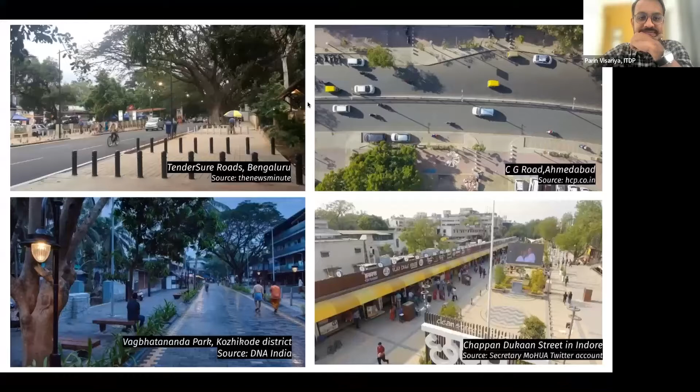Thank you, Angi. So what you see on the screen are some pictures of street design that have been implemented, and these are nothing but street designs from our own cities in India. The very first picture you see is from Bangalore, and many of you in the recent offline workshop also got a chance to experience these streets.

We have a commercial street in Ahmedabad, CG Road, which has seen a process of redesign not once but twice. We have a street from Kozhikode, and we have a pedestrian street right in the heart of the city in Indore called Chappan Dukaan. All these streets today have become benchmark streets.

And these are just a handful of streets that I'm showing you all. I'm sure our cities have done many such great examples, from Pune to Pimpri Chinchwad to Delhi to Chennai to Amritsar. So there's a lot of streets that our cities have designed that are at a benchmark level, created with good quality, good design.

And today these streets have not only improved the movement of people who walk and people who cycle, but at the same time have also improved the movement of traffic. So it's creating less congestion, less chaos, and giving a new image to our Indian streets, where we always felt that our streets are chaotic.

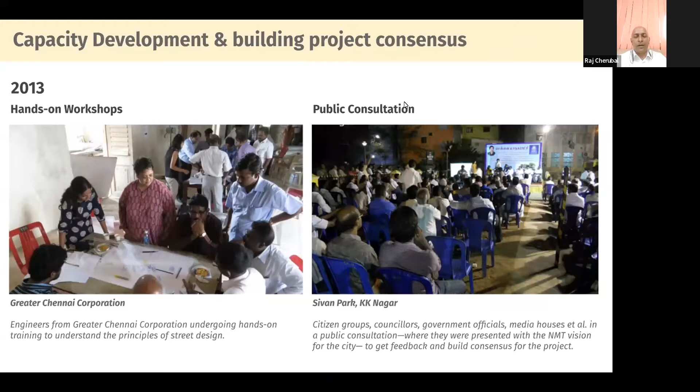The process started long ago, where the idea of having a street for people itself was like an alien idea. Why would you want to do that when you have so many cars on the road? So it took an amazing amount of persuasion from all kinds of different people, including ITDP and various other NGOs, a lot of parallel activities. Luckily we had a lot of sympathetic officials, and even when they got transferred, wherever they went, they ended up helping us.

I don't know about Paris and London, probably they do have capacity, but even there I suspect they get good consultants. We need space for people inside the city government who understand this subject, no question about it. They also should have some linkage with organizations like ITDP, etc., who can bring global experience. That's also very important. But the problems of the street are so complicated that no engineer or architect in the corporation can handle a city of 1 million, 10 million, and so on.

So, for example, just look at this street. The argument was, why would you want to widen the pavement when there's so much trouble? Is this a residential area, is it a commercial area? Whether it's commercial or residential itself is a big argument, and so on. So it takes a good consultant who understands all these different aspects to figure out how you park a car, parallel or perpendicular, who do you listen to, the shops or the walking people, what about the street hawker?

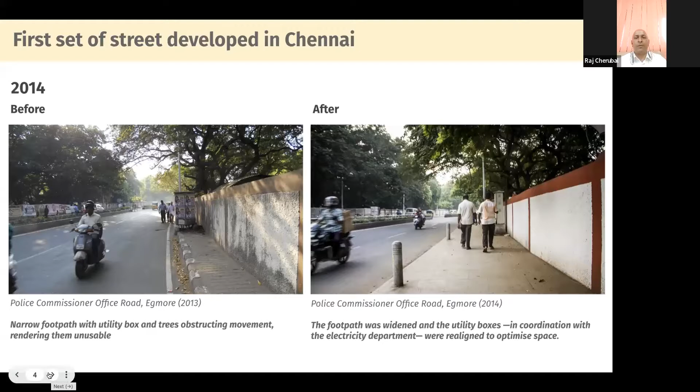But what people don't realize is the moment you build a footpath, people start walking on it, and people actually stop taking autos and cars. They start walking long distances just because there's a footpath. So you can flip through it, we can go through it.

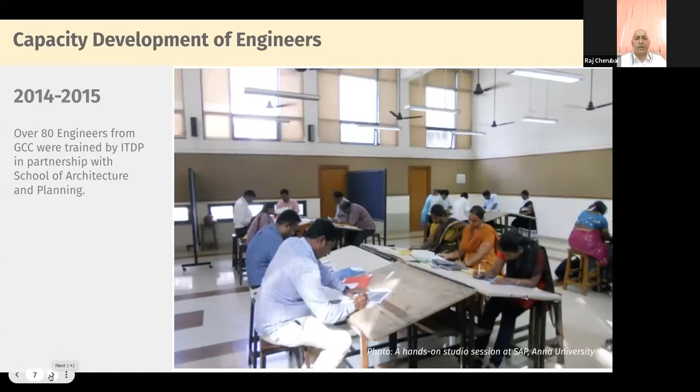One of the things we did, of course, was the city became first to adopt a policy. But again, I wouldn't put too much faith in policies, because policies come and go. You need infrastructure, you need the capacity to translate policy into reality, but policy surely helps. You need to build the capacity of engineers, because it's not about engineering, it's about the mindset. You need to be able to see different things happening.

A lot of visits to various places, we've learned a tremendous amount from Bangalore, Pune, and a bunch of other cities. Amazing stuff. I'm a big fan of foreign travel by government officials. I know people get cynical about it, but unless people go abroad and see what's going on in comparable cities... it cannot be a Scandinavian city where there's hardly any human being. It has to be a Hong Kong, to figure out how they handled the same density but with gigantic footpaths and gigantic trees and whatnot.

Even Chinese cities for that matter, so anywhere comparable, so people understand it is not an engineering problem, it's more of political will and public desire. So you can flip through it.

If I were to start all over again, or advise another city, what I would suggest is to do various things in parallel. One, try to identify proper detailed project reports for networks of cycling, networks of roads, and so on, and assume you're going to implement this in the 5-10 year range. Because otherwise what happens is we are simply reacting to problems, saying this road can be pedestrian, that road can be pedestrian.

This consultant business will take a long time because the city may not know how to handle the consultant, and there will be all kinds of complications. So in parallel, get consultants to study the network.

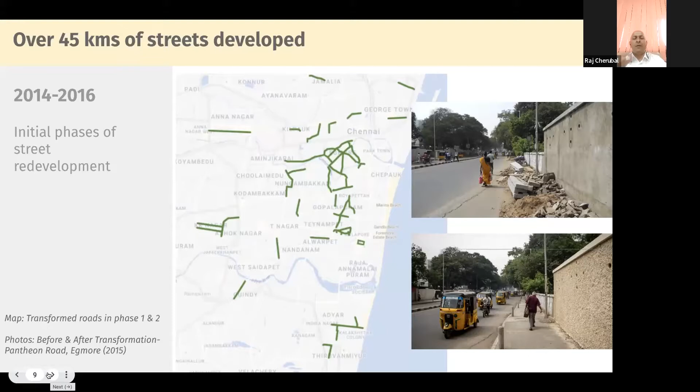What you're seeing on the screen is the Egmore network that we tried to connect. Bits and pieces of footpath being made, but the idea is to slowly connect them so people can walk long distances, not simply 100 or 200 meters. So have a long-term plan.

Things like happy streets and car-free Sundays are important because people need to reimagine the space. It's very difficult - if you've watched ITDP presentations, it's obvious you can do it, but for 99% of people, it's very difficult to imagine a street can be used for something else.

So it is important that we do these kinds of activities so people start thinking differently - why not a vendor, why not children playing on the road? It's a mental barrier. It's not an architectural problem, it's not an engineering problem.

I'll try to go as fast as possible. At some point, once you have, let's assume, 100 kilometers of network, you think amazing stuff can be done. You need to realistically break them into packages with manual standards, etc. You need to get a lot of different consultants empaneled so they can be hired very fast and you can start parallel work.

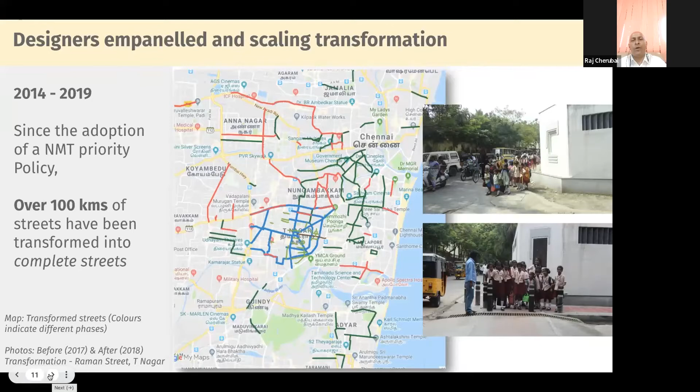Because even if you have a great DPR, sometimes it will get stuck somewhere - either the police may not agree, or somebody else may not agree, or the public may not agree. So create DPRs in parallel, so that once you prove one place, everybody starts asking you for a pedestrian plaza or a cycle track, because initially there's a lot of skepticism. You need to act in parallel because we're no longer in piloting mode.

It actually took probably 10 years for us to get here because we created ideas, we created concepts. There's no money, then there is money, then there is something else. So each parallel process of each street is going to take probably a few months or a few years, or probably never happen.

Now the good thing is every elected representative wants a pedestrian plaza in his or her constituency. Then there are practical challenges - parking management is an extremely difficult project, but most of these pedestrian footpath activities will not succeed unless you have control over parking, which means you need to start working on parking in parallel.

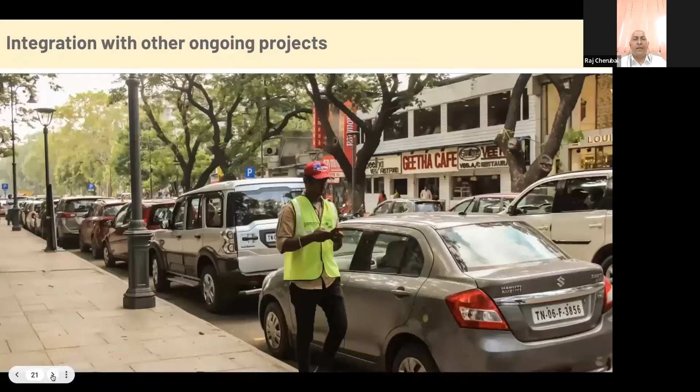What I'm trying to say again and again is that this is an iterative process. When you look at a finished picture, it looks beautiful, but it is still an unfinished iterative process. This is how a city will evolve - you can keep going through this.

And then what we did was, in Chennai, the government decided - now that the pedestrian plaza is a big success and people are really happy, let's take it further.

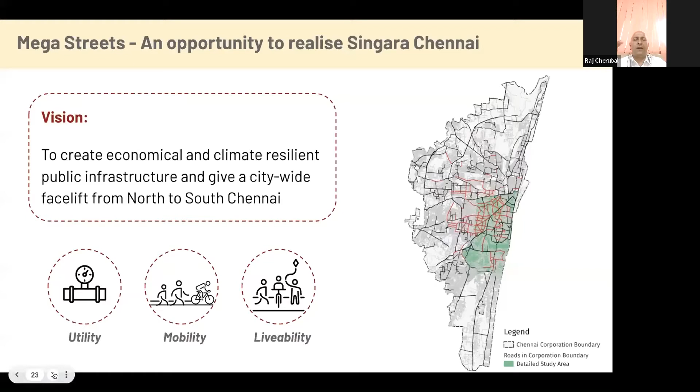Let's get some serious consultants, take six packages in the city, and study not simply from a road point of view or a footpath point of view, but from an area point of view. So you have to take flooding into account. For example, Chennai has a lot of flooding problems, which means the consultant has to answer: if there is water on the road, where is it going to go? Is there a nearby park that can act like a sponge city, and so on and so forth.

Then think of it like a cake with multiple layers. What about safety? What about children's safety? Where is parking going to happen? Where's cycling going to happen? What about the trees? What's the point of building a footpath which is super hot and nobody wants to walk on? So how are you going to plant trees which don't obstruct the footpath?

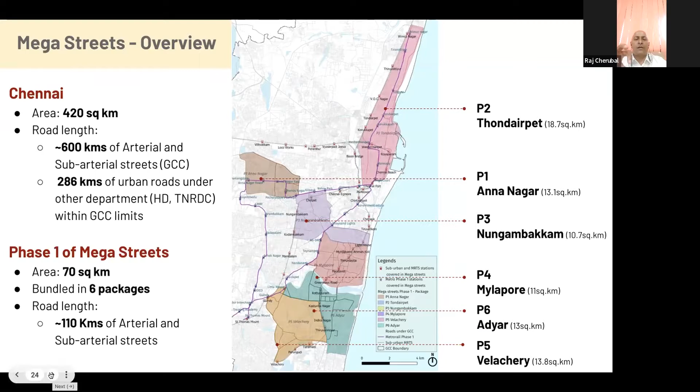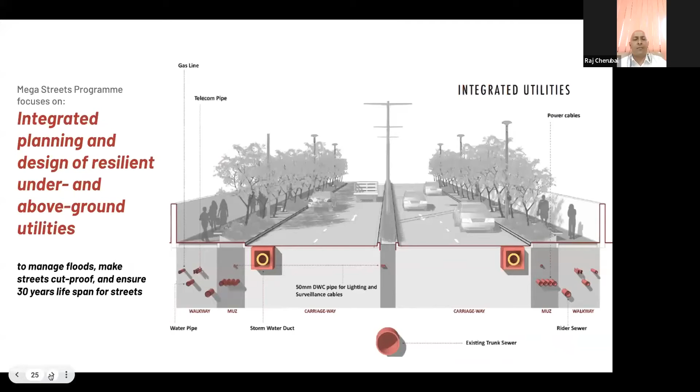The consultant may initially look at it purely from a footpath point of view, or how to draw a line between footpath and road. But we've come to a point where consultants in these six gigantic packages are looking at everything on the surface and everything under the surface. This gets more complicated because the water department may be completely separate, and may or may not have a plan for the pipes underneath. If you do beautiful work on top and the pipe guy doesn't come, it all goes down the drain.

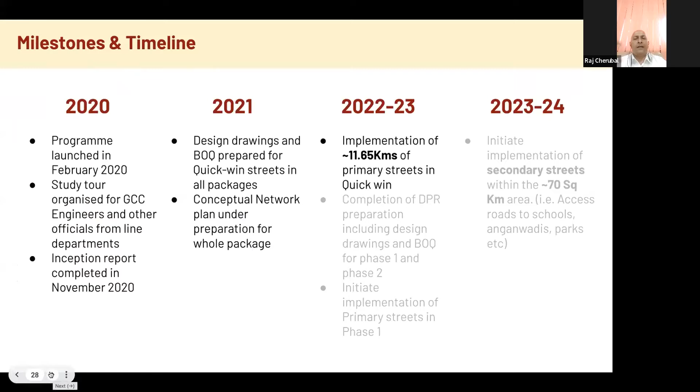The point I'm trying to make is: start piloting if you want to, or get great consultants. Many cities have already done this work, so I'd suggest getting RFPs that capture the essence of all the different things the consultant is supposed to do, and make sure the consultant follows through on all those things.

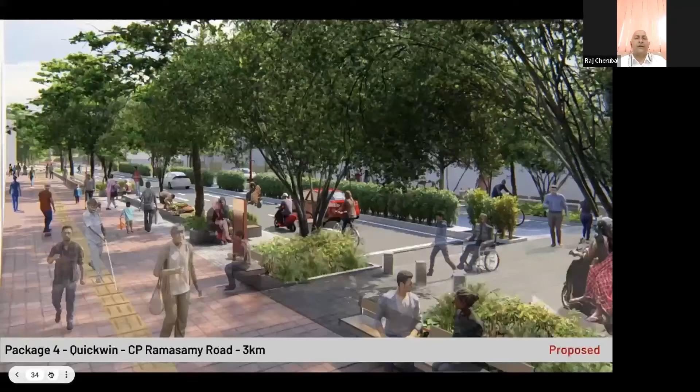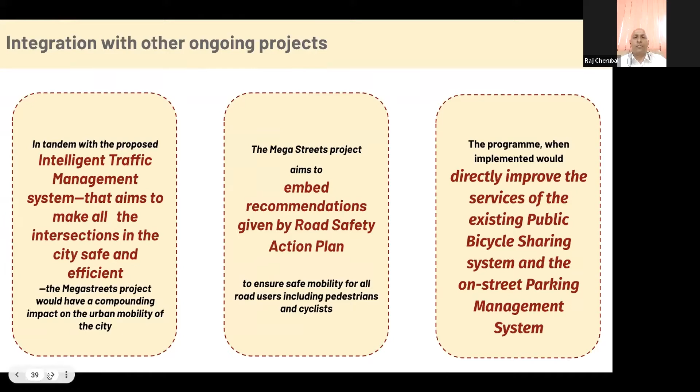Also in terms of dealing with police, the public, politicians, and getting buy-in, and so on - do not underestimate the power of consultants and groups. This is not something a handful of people can do; it has to be a much bigger effort, but we have to start somewhere. I'll stop here, and when there are questions in the panel, I'll answer them.

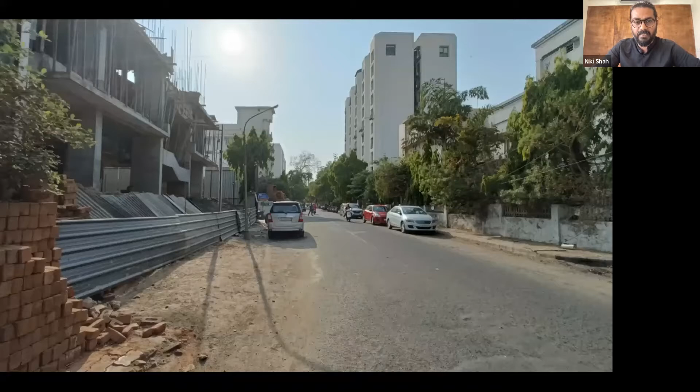Sometimes it is active, which has a beautiful market, but not really very well integrated. Cities are always in transformation, so you'll have an old building and a new building construction, so you'll always have a problem with the interface of the streets and the adjoining properties. That's also an important aspect of street transformation.

Despite having footpaths and everything, where many efforts have been done by the corporations with better designs, not in an integrated manner, we still end up not using it the way we're supposed to. So random parking, vendors, and storage happen on the street, which is not really street transformation.

Despite having a wider footpath, probably there are no trees, and vending isn't really organized well, so you end up looking like that. And of course, parking becomes a major issue, which everybody talks about as the major problem we need to solve.

Despite having footpaths and everything, we still need to walk on the streets because there is no continuity. That's what our streets actually are, and we need to reach far beyond that. The street is a right of way, so every property needs a right of way - we need to make sure we don't ignore that.

Most of the time, as Raj mentioned, if you just do it with one intention in mind - just creating a footpath or a line of curb - without worrying about all these things in an integrated manner, you end up not doing anything. That's where an expert - a consultant or a team with experience on such aspects - can manage the integration aspect. I think that's important for such projects; otherwise we will always see it as a unilateral work or project.

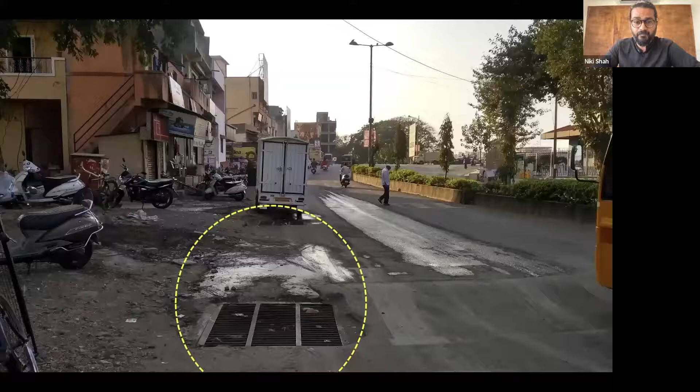Sitting benches, everything which is necessary. So these are typically the efforts being made in local situations without any design interventions, and that's where we end up eventually getting.

In larger planning, the lane of roads, the traffic, the access roads and everything - you end up wasting the important public space also if you don't plan it well in a larger network. And typically this is what our streets are.

And that's our aspiration. Why not? We should be able to do this also in our cities. And as Raj mentioned, there are many examples which we have already done, but it needs to be on a much greater scale.

Designing and detailing becomes an essential part, apart from all the stakeholder participation, departments, utilities, and parking management. Ultimately, the physicality of the whole thing plays an important role. I'm coming from the design perspective in this case.

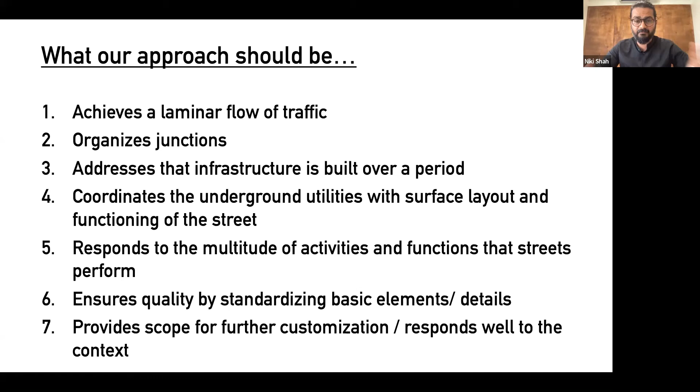Of course, there are many more - I'm highlighting seven. And focusing on design and detail, as Jinal mentioned in the beginning, designing and detailing is crucial for any such things, not just the overall planning.

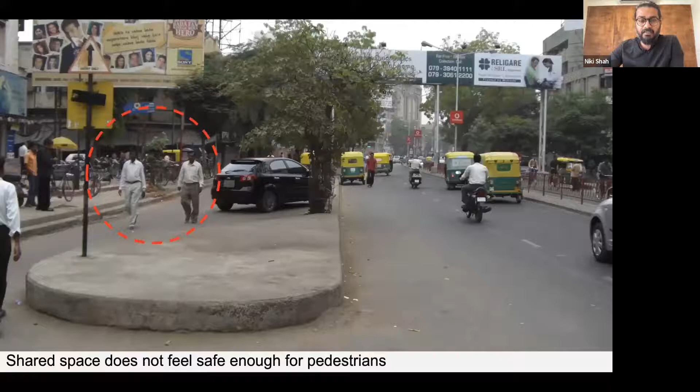But eventually it has aged, and we needed to completely redesign it for the new age and current time. So there were problems of vending, parking not happening properly, and car sizes have increased compared to 25 years ago, so the parking sizes were not really helpful. There are many practical problems, a long discussion on that.

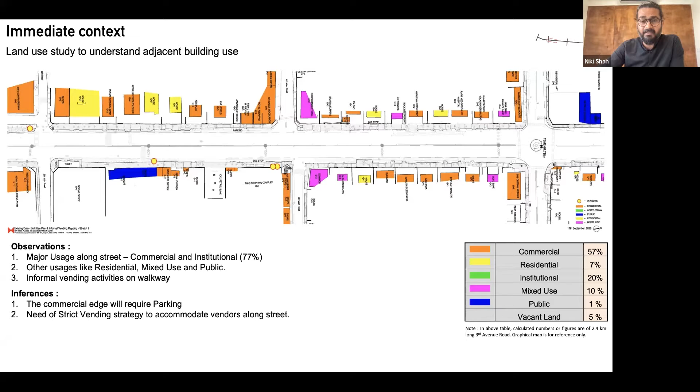So that needed something. There are two aspects of the design: one is the larger planning and the detailing. For that, we make sure we understand the street well, so a bit of context study is important, mapping it properly, so we have a clear idea of how to solve the problems of the street.

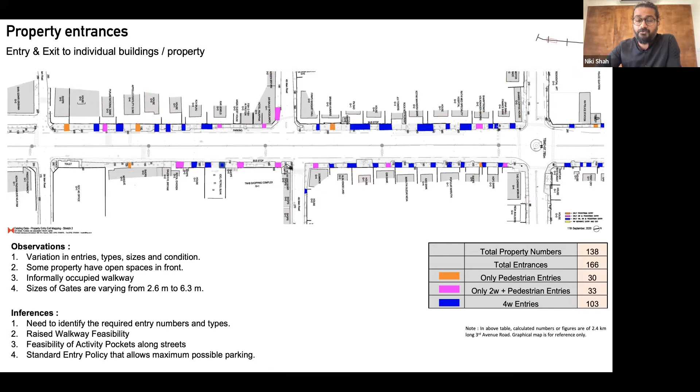Land use, frontages, access points - this is typically the problem, one of the biggest hurdles, where we talk about the continuity of the footpath. There are so many access points, so many smaller plots adjacent to the streets, which continually break the continuity of the footpaths. So this is something crucial to integrate in the design.

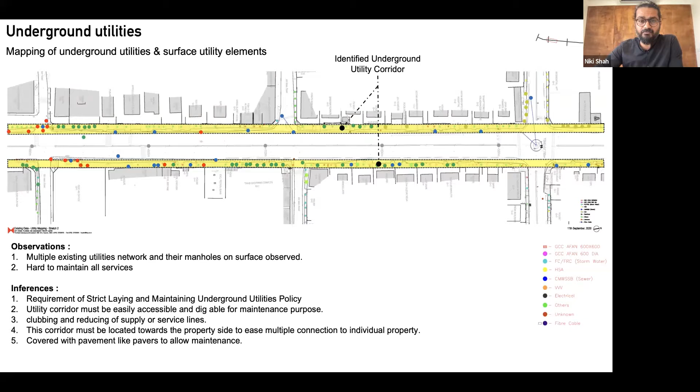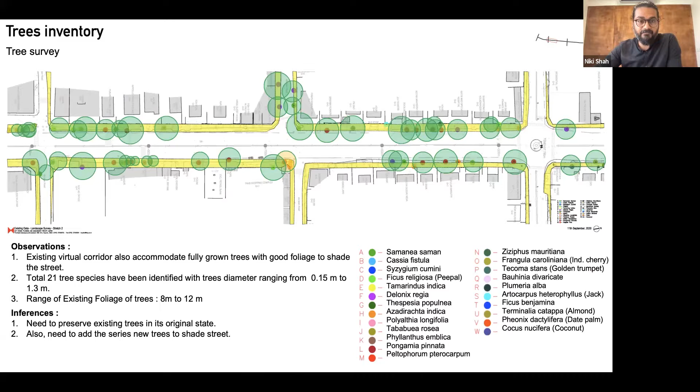Utilities - a lot of streets are old, underground services are there, we don't know where they are, needs to be mapped. Trees, wherever they are, need to be checked and mapped. In the physicality of street transformation, we take care of them, because usually what happens is we don't design the streets with trees in mind, end up having the trees on the asphalt, and eventually they get cut because they hinder traffic flow - this has happened in many situations. It really needs a tree inventory at one point.

Of course, the parking study needs to be done as a process, day and night, vending day and night. Planning and trying out options are also important - sometimes you don't have one solution. You have to brainstorm and have discussions with various departments, the traffic police, and other stakeholders to make sure we are really solving the problem of the place.

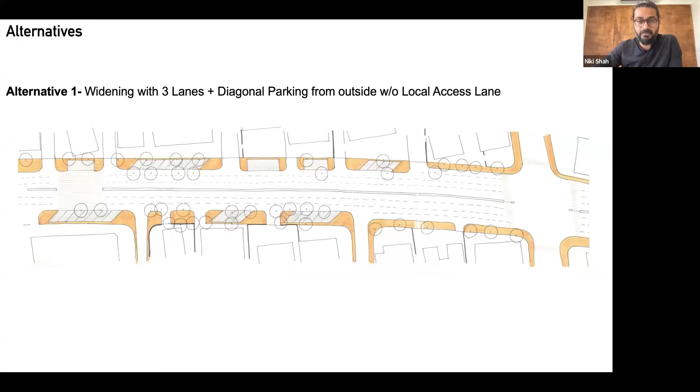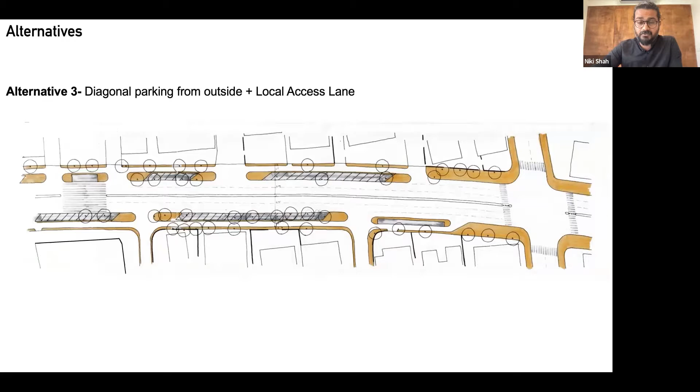This is an example of CG Road, where this was the earlier design already in place, which we wanted to transform. There was a lot of discussion - some people said to widen the street instead of 2-lane to make it 3-lane, then put parking, then there's no footpath, then 2-lane and parking and footpath. Many iterative processes happened a long time ago, and it took a long time to conclude.

And eventually we ended up concluding on parallel parking for the first time in Ahmedabad - through parallel parking, a wider walkway was achieved.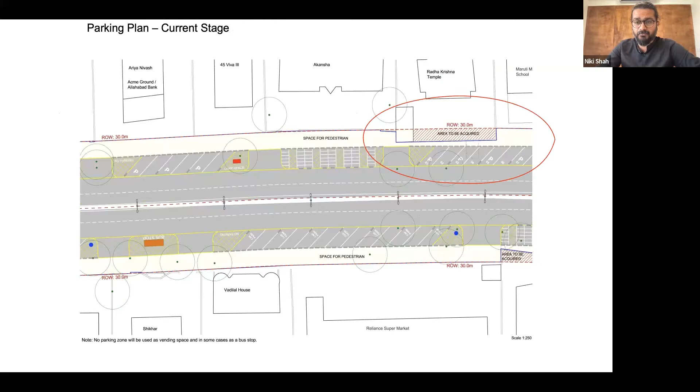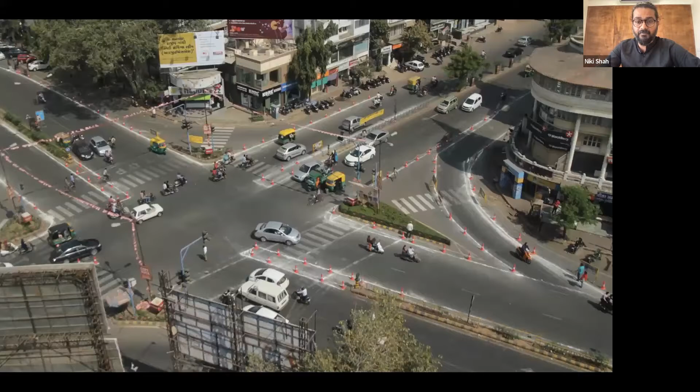So sometimes you also need to try out temporary solutions meanwhile, while you do the larger interventions, so you don't end up making an error. You also do some sort of parking management and try out if this is working for this particular street, and take up eventually the final solution.

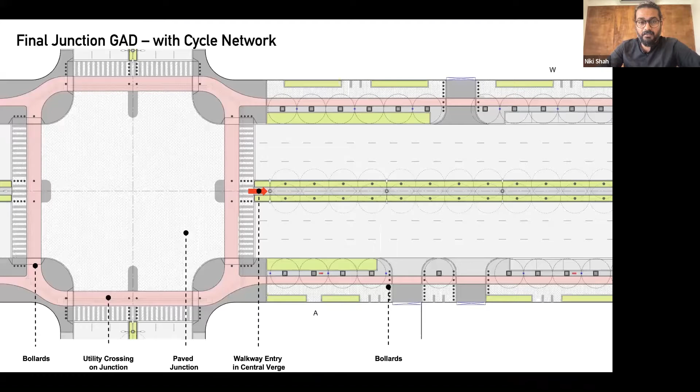Same thing for the junctions - traffic police are important for such things, so you always have one-on-one discussions with them to make sure this is moving, and then eventually take a final call and do the transformation with cycle tracks and everything.

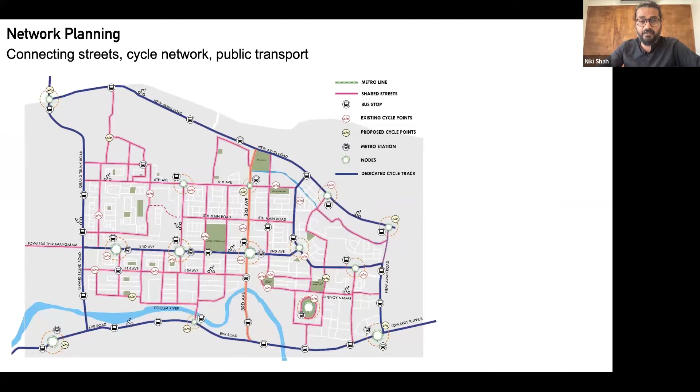The cross streets planning is important, and even the larger network planning is important. This is in Chennai, where we are looking at the larger network and public transportation, cycle networks, and everything. Underground infrastructure, as everybody knows, needs to be integrated well in the design - if you don't do it, the street transformation will eventually be a failure.

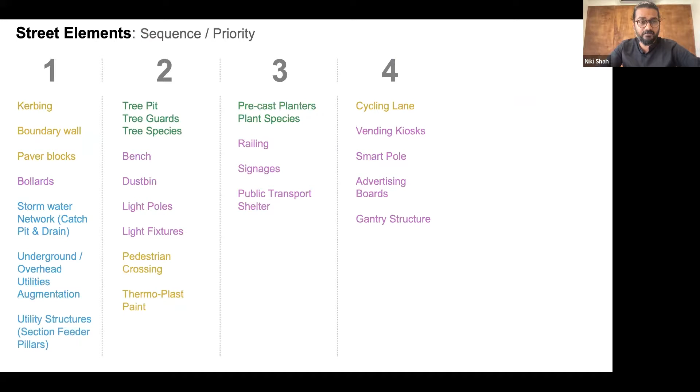Simple and robust detailing is critical, I would say - there's a lot listed here, I can share the presentation later to see. So the first thing we solve is the entrances to private property, which determines the actual street design, I would say. So various options, and how do you make sure that footpath and cycle tracks are continuous.

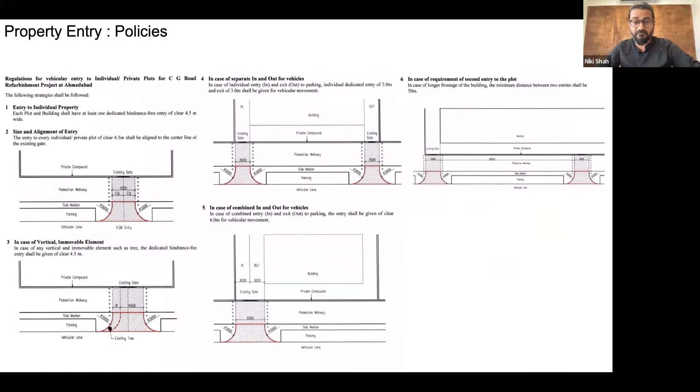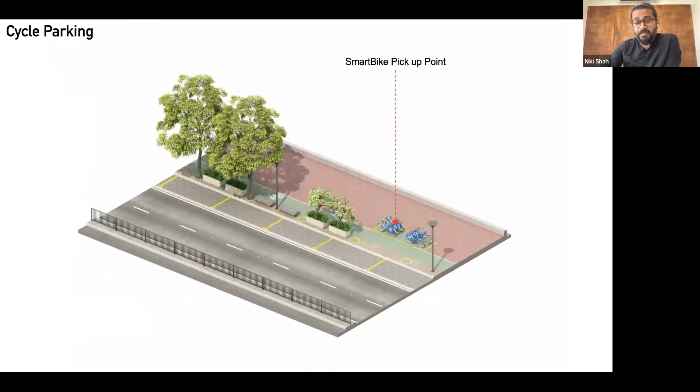There is standardization also, no parking, making a policy out of it, so everybody has a fair chance. Bus stops, utility boxes, dustbins, street junctions, pedestrian crossings, cycle parking on the footpath, toilets and vending space.

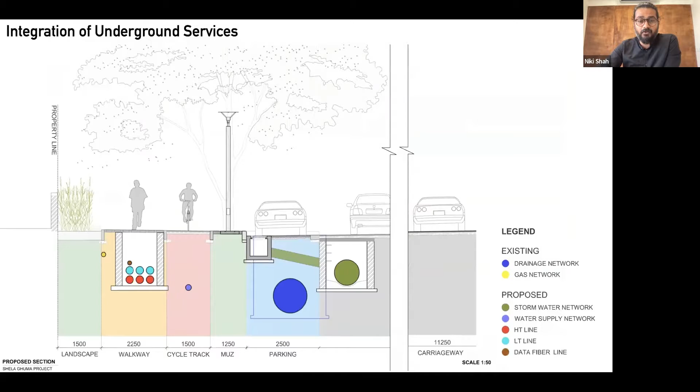All of this is something which needs to be done well. A lot of drawings, a lot of detailing is needed to make sure that we have resolved everything. It cannot be done with a couple of drawings, so there are hundreds of drawings to make sure that we do that. Good detailing, putting them together, aesthetically elegant design solutions are also important, not just makeshift situations.

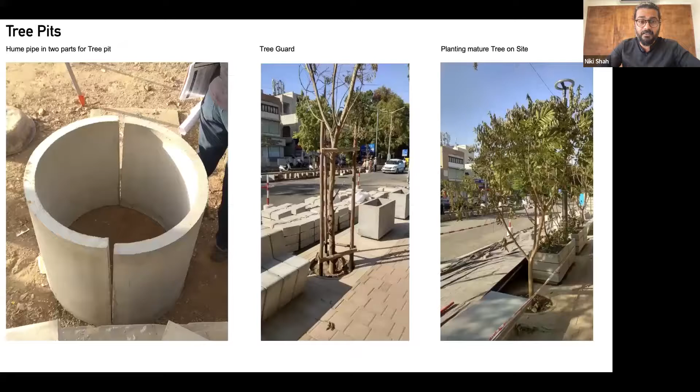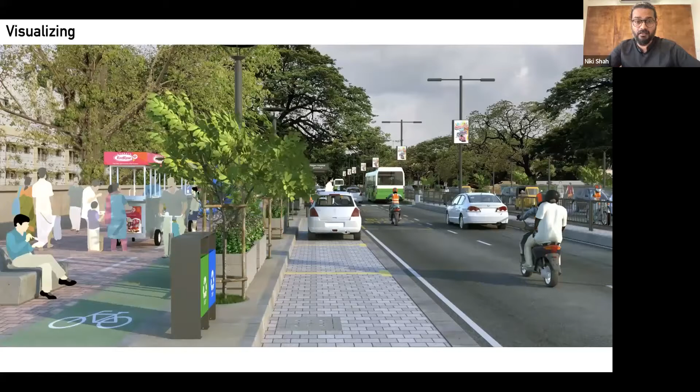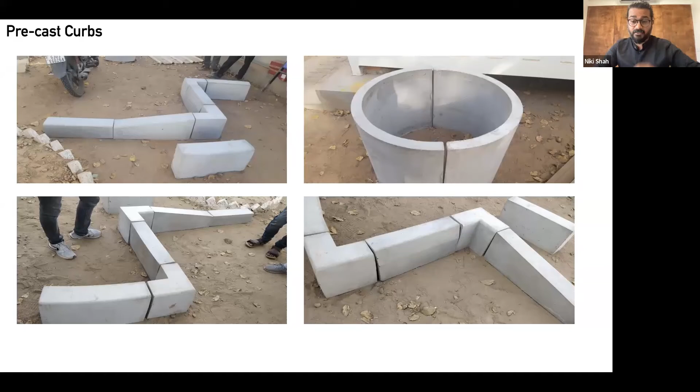Prototypes, of course, good sampling is absolutely important, where the department and the corporation actually help. If there is a good team, one has to make sure that we do this prototype. Without that, we don't get good quality of construction. Also trying out the samples, making sure everything is functioning well, checking with various departments.

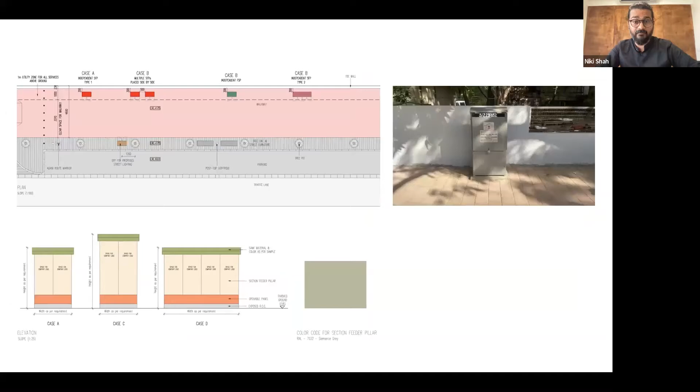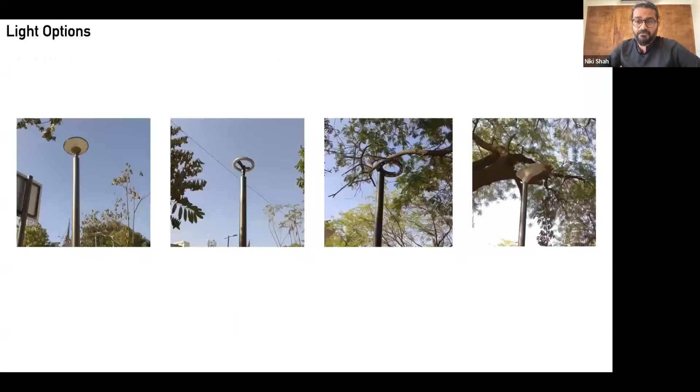On-site, sometimes solutions are needed, so all of that. Site visits are important, sampling to make sure we have tried out enough options.

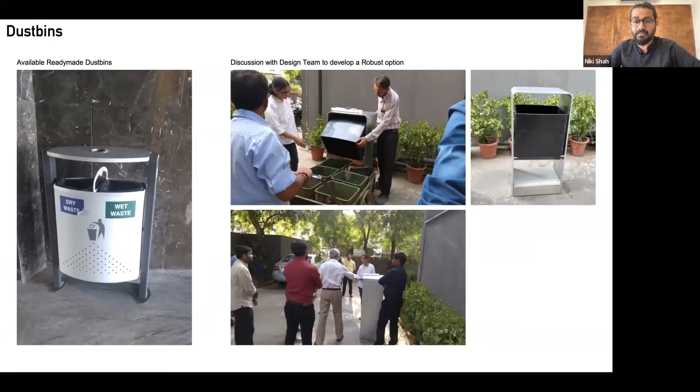Also checking ourselves on a couple of things. Dustbins are actually a crucial element where we face the problem of maintaining it, so we even do a prototype and check them along with the corporation.

Trying an outcome, definitely, you've seen a couple of pictures already. This is one of its kind projects in Ahmedabad. We are also doing a couple more in line with this to scale it up further. And that's what eventually you get.

This is done with design.story. Sophia is here, we worked together to film it, and the film is available on Facebook and other places, Instagram. And then we get feedback on how this is, and of course we use it for other projects and continue learning from our work, positive and negative both.

Yeah, thank you. Sorry, it was a little longer, I guess.

Thank you so much, Niki, for taking us through the journey of, and especially highlighting the different scope of urban designer, right from planning, design, and going into every small little detail.

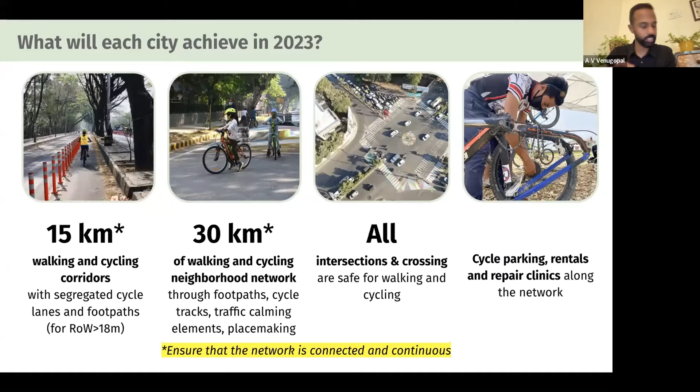What you see on the screen are the C4C, S4P national challenge goals that you're all familiar with, shared with you time and again in offline and online workshops. The webinar today primarily focused on this first bucket of action: designing it right before we implement the infrastructure. Towards this, my colleague Bala will take you through the submission requirements for October as well as April 2023, and some milestones under Action Foundation and Communications that all cities are encouraged to work towards.

As shared in previous workshops, these are the four steps towards implementing permanent interventions in this first bucket of action. The first piece is on identifying sites in your city and developing a project proposal. The second is on preparing detailed designs, which we've discussed with the panelists today, and the meat of my discussion will also revolve around this. The third is on testing the design on the ground, capturing learnings, and then making it permanent.

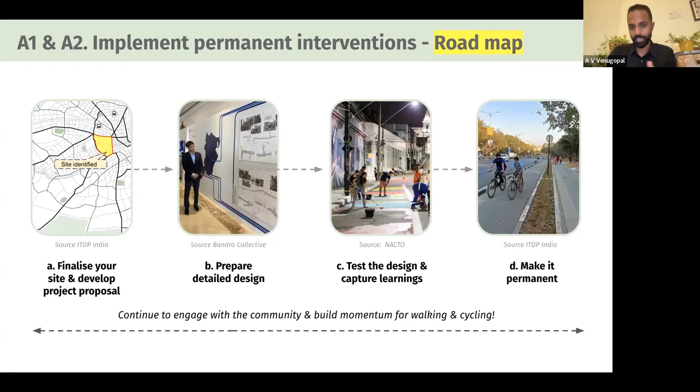The first step, though discussed in depth in previous workshops, is critical - like how Raj and Nikki mentioned - to capture the project at different stages, starting with why you've chosen a particular site or multiple sites. In Chennai's case, six different neighborhoods - why they were selected, the opportunities, the issues they face, etc. This forms the backing of the scope of work and the RFP you create, and also helps in pitching to investment banks and others to make a case for why a particular project is required in a particular area.

So with that, I'm going into the meat of the discussion on preparing detailed designs. To start, I request Angi to share the poll through which we want to understand how your city prepares detailed designs for implementation.

Giving it a minute here - how does your city prepare detailed designs for implementation? Is it through developing designs in-house? Is it through empaneled designers? Is it through project-specific hiring of consultants, or is it through a mix of both?

Through our conversations and the challenges with the cities, we've realized that some of you are familiar with the different models, while many are not familiar with what an empanelment process could be, or what a robust and stringent project hiring could be. That's what the next slides will cover.

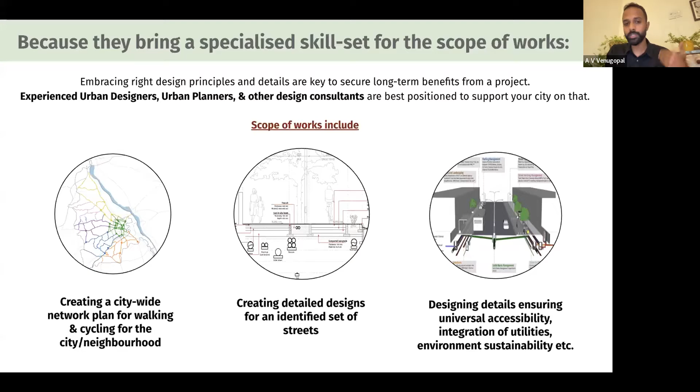So it's because of the varied skill sets required for these activities. If you compare the laptop in front of you, or the building you are in, or a hospital, any such product or space has multiple people with multiple skill sets coming together. In the building you're in, you have MEP consultants, architects, interior designers, structural engineers - many people with their own skill sets, not just one set of people trying to do all of them. Different people coming together contributes to the success. Similarly, the need for people with different skill sets - urban designers, planners, and others - comes into this picture.

Taking a quick look at the scope of work itself: number one, on creating a network plan, which can be for a neighborhood or the city, has a precursor activity of having discussions with stakeholders in the city to develop a vision itself. Very broadly, in the cream color bubbles, the scope of work is mentioned - for the consultant, it's about collecting, compiling, and analyzing the data across the neighborhood and city.

Then developing the long-term vision for the city or neighborhood, depending on scale, of where it is and where it can go ahead, with a lot of stakeholder consultations with different departments and the public toward developing this. Based on that, preparing a neighborhood or citywide network plan, and then preparing a phasing for this - year 1, year 2, year 3 - which streets or neighborhoods can be taken up, and what the budget would entail for doing this.

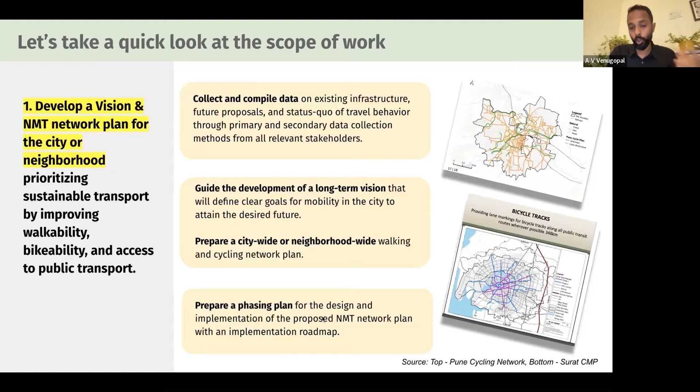So broadly, this is what the scope of work of creating a network plan at the neighborhood or city level would entail. The second bucket is that of detailed designs. Nikki has taken all of us through this in detail, so not spending much time here. But broadly, it entails developing an inception report, conceptual plans, working with the city, doing trials on the ground, tactical urbanism trials, and then developing detailed designs - the long list of drawings, BOQs, supporting the city during implementation on the ground, impact assessment, and more.

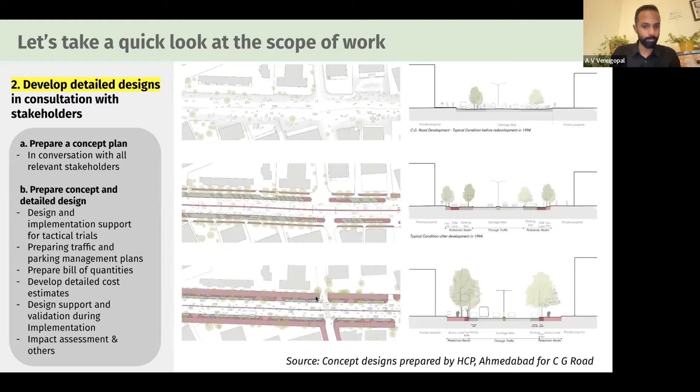So like Raj mentioned, it's high time that we develop templates, and that's what we've been doing through the challenges, through the policy templates and other toolkits that we've shared with all of you.

Through the learnings we've captured working with a few cities in the past, we've put together a template for street design projects as well as creating network plans. By mid next week, we'll be sharing this to all of you.

Like the images that Parin showed upfront of the panel discussion, all those images of Pimpri Chinchwad or Mumbai are projects where there's a flair of design that's come in, with different experts coming together. That's why the project looks so successful and has good responses from people.

So the next question is, how do we ensure competent design consultants are hired? In a nutshell, for those not familiar, or as a reminder, the solution is through a streamlined and stringent evaluation process. When a project RFP is put out, which can cover multiple project sites, consultants will attend the pre-bid meeting and submit their bids.

All bids will be opened and then filtered based on the pre-qualification criteria set in the RFP. Those who are filtered through will then be shortlisted and evaluated based on the bid system that is there.

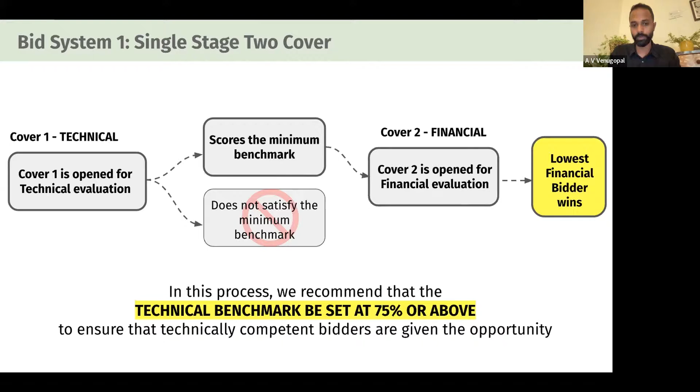This is a glimpse into the Mega Streets Chennai project that Raj took us through, where a single stage two cover bid system was used.

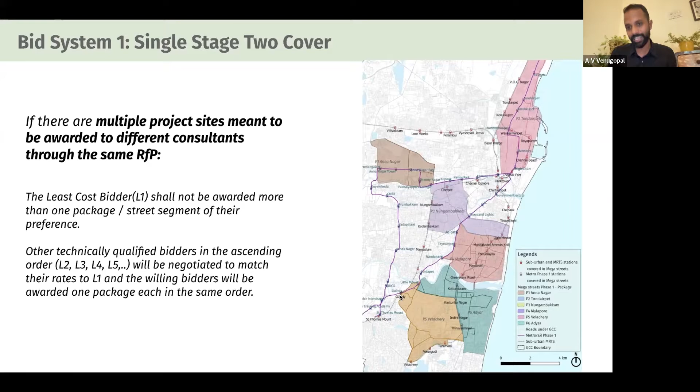There were 6 packages in 6 different colors that you see as well. The approach here was that after the technical evaluation, the L1, the least cost bidder, got to choose the package of their choice. So assuming the consultant chooses the pink color on top, the second consultant, the L2, then had to work matching the L1 rate and got a chance to pick the second package of their choice. In case the L2 consultant was not comfortable working at the L1 rate, they pulled out, and then L3 got an option to decide, and it went around such that everyone got to pick a particular package. So this is a particular model where a single RFP can have multiple projects and multiple project sites covered in them.

Quickly going through the next one, the quality cost-based system, the difference here is that both technical and financial bids are opened together. In the previous one, you had the technical opened, evaluated at 75%, and then financial. Here both are opened together, and the RFP clearly mentions the weightage for evaluation of each component. What's recommended is usually somewhere in the range of 70% for technical evaluation and 30% for financial evaluation. Based on your overall score, the best scoring consultant gets the bid.

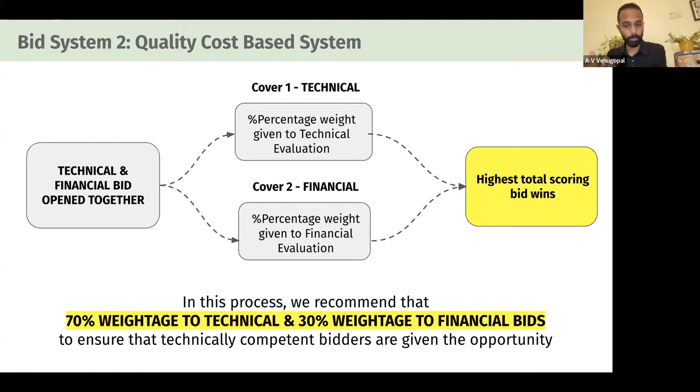So those are the 2 bid systems that are commonly used. Now just quickly going into the approaches to hiring design consultants, which was discussed in the panel discussion, to summarize: number 1, you can hire consultants based on specific projects. Number 2 is empaneling of design consultants. And number 3, which many cities have been experimenting with and doing quite well recently, is invitation-based low-value procurement.

We'll be sharing these slides for you to go through in detail, but broadly comparing across the 3: the first one, tendering, is normally done for a particular project or projects, like the Mega Streets example, and a budget has already been allocated by the city because they had to put out the tender. The empaneling approach is when the city wants to bring on board a pool of design consultants for a period of time, tapping into that pool for different design projects as they emerge. The third one is normally done as quick hiring for small scale, neighborhood projects.

If you attended the previous workshops, you would have heard Sensing Local from Bangalore speak. Projects in Bangalore, like the Suma project, partly came under this, where it depends from city to city and state to state, depending on what their benchmark is for low value. It might be 5 lakh or 50 lakh depending on your city, but you could reach out to consultants within that bracket under this vertical as well.

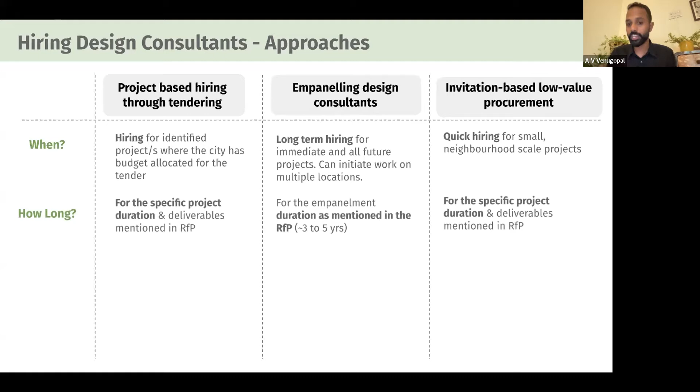The time duration for the first approach is based on the deliverable and the period that the RFP speaks about. Number 2 is about the duration of empanelment that is mentioned. Number 3 is for the specific deliverables itself. The number of consultants for RFP and project-based hiring can vary. Like I mentioned, Mega Streets had multiple consultants hired through a single RFP, or it can be a one project, one consultant hiring as well.

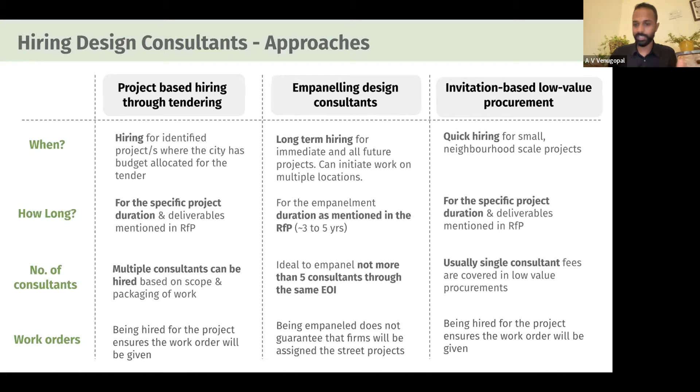For empaneling, it's ideal to empanel not more than 5 consultants through the same EOI for a city. If you have a different scope of work, you can empanel different consultants for that separately. For the third category, it's usually single consultant fees covered in low value procurement. The only difference in work orders is that for empaneling, just because a consultant is empaneled doesn't mean they're guaranteed a street project—it varies based on different factors. But for the first and third approaches, if you're hired for the project, you'll get the work order itself.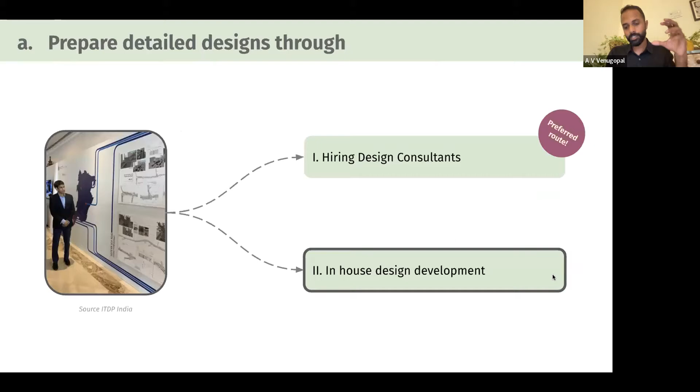That brings us to the second approach that cities use: in-house design development. While a few cities are working on developing designs in-house, like the metaphors I used earlier, it's always good that when you're new to the space, you start small.

So if you are intending to develop designs in-house and you are not familiar with street design projects, start small with a small site for tactical urbanism or a neighborhood street or so. Ensure that you cover all the processes mentioned in a normal scope of work, from adequate understanding of the site, ensuring the designs meet design standards. It's reviewed by a technically sound review committee.

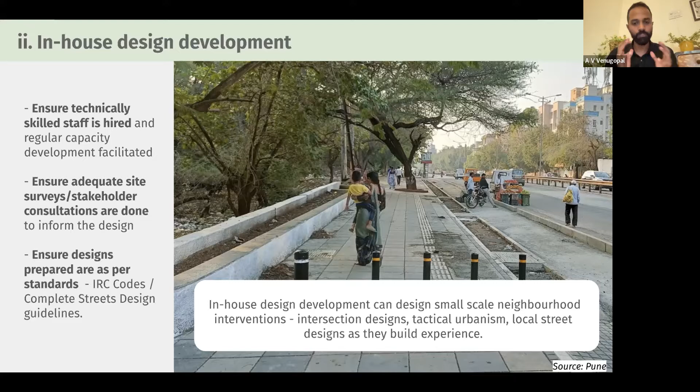So smaller scale projects are normally recommended before you build your experience and capacity in this space, and you hire the right set of people, most importantly, so that you have the skill sets of urban designers, planners, utility experts, and others, so that when you look at the site, you are able to look at it comprehensively and develop a design accordingly.

So cross-cutting both these processes of hiring, whether in-house design development or project-based hiring, it's important to have a technical review committee in place. It could be a subset of your larger Apex committee. The role of the technical review committee is to ensure designs are supervised at different stages, scope of work requirements are met, and the right set of people are onboarded. This committee reviews proposals that come in and ensures the process happens correctly. So the technical review committee plays a very key role in both processes.

And all of this will be captured in the RFP template that we share with you next week.

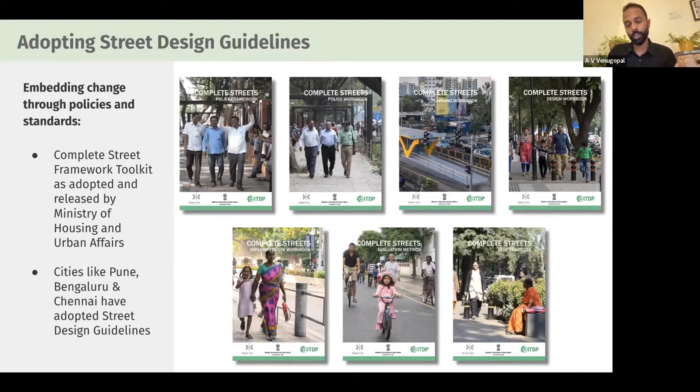To sum up the point that Raj and Nikki mentioned about design guidelines, cities like Chennai, Pune, Bangalore and others have design guidelines adopted, which follow the Indian Roads Congress as well. It's been adopted by these cities, and we'll be sharing a template of the version adopted by Smart Cities Mission and MoHUA in the coming months. So we urge all cities to adopt the design guidelines, because no matter which consultant you work with, or if you develop designs with a technically sound team in-house, you're able to refer to these design guidelines to ensure your designs are as per standards.

So that's about it. We have spoken about the next step of testing and learning at length in previous workshops. With that, I hand it back to Varsha.

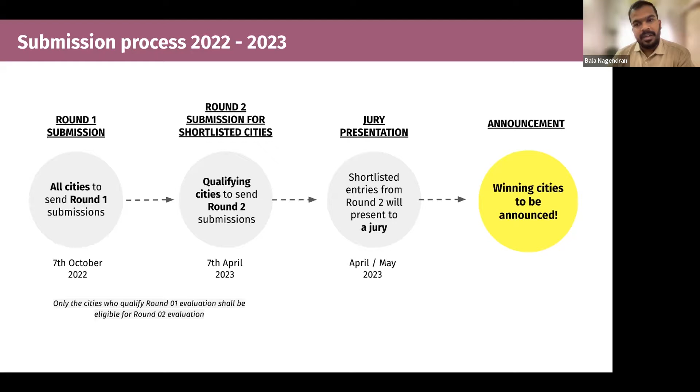All the cities who want to be part of the challenges have to meet these basic requirements set forth for round 1. We'll have a quick look at them in the coming slides. Before that, once cities move to round 2, they'll be further shortlisted, and only eligible cities will present to the jury, who will finally choose the winners.

Under the action bucket, we expect you to have at least 15 kilometers of detailed design done to implement the healthy streets network. Many of you already have network and scale plans, so please start designing your streets with more detail. Out of the 15 kilometers, you must have designed test trials for at least 5 kilometers. It need not be a grand tactical urbanism intervention—it could be simple traffic trials or simple community engagements—but we want that done for at least 5 kilometers.

We also want you to work on traffic calming as a big component. It won't be a heavy lift—you can implement simple footpaths with simple traffic calming elements for under 10 kilometers of streets. Other initiatives like bicycle sharing systems or cycle training clinics would be appreciable, but they are not mandatory.

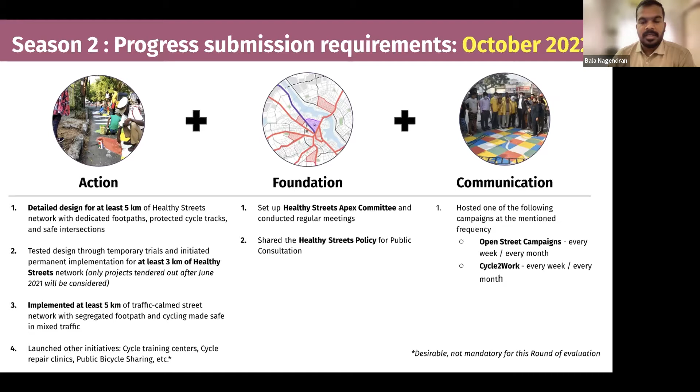Share it with the public for consultation. And finally, for communication, continue our Open Streets campaign. A lot of cities have also recently launched Cycle to Work or Cycle to Shop campaigns. We want them to stay consistent so that could become part of your submission. We'll also soon be sharing the leaderboard for Healthy Streets, Healthy Cities, which could help you track your progress.

Meanwhile, make sure you fill in the monthly form so that we are aware of your progress so far. Now, for the submission format itself, this first round of submission is going to be a very simple one. We just want to have a look at what you have achieved so far. It's going to be a Google form based submission. There is not going to be any presentation or jury as such for now.

We will share a Google form very soon, right after this workshop. Share all the details through the Google form. One important component of the submission is the cover letter. We require a cover letter from each city highlighting all the work completed after June 2021, and how it addresses the goals enlisted for the 2023 Healthy Streets, Healthy Cities goals.

So we look forward to receiving your submissions, which are due on October 7th. Good luck to all the cities. We'll also soon be sharing the templates and the Google form for you to fill up.